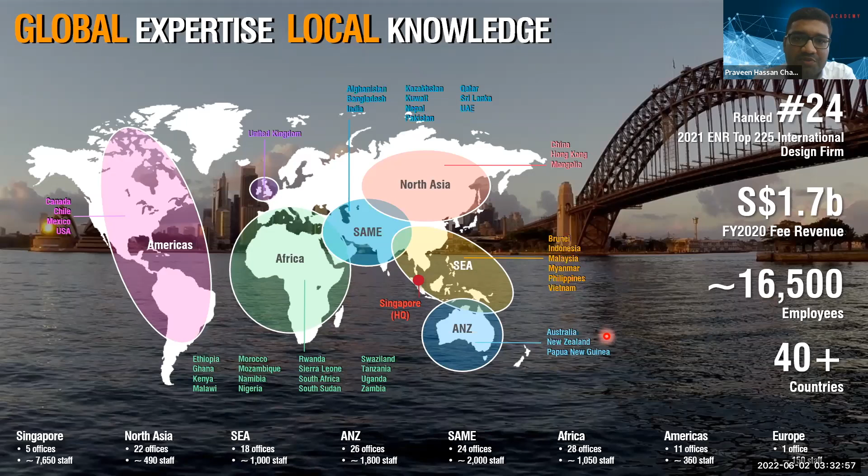So Surbana Jurong is one of the Temasek portfolio companies, and we are under the consumer and real estate wing of Temasek. In terms of our global experience, we are ranked 24th of the top 225 international design firms with a revenue of 1.7 billion. We have a global workforce of 16,500 plus, I think close to 17,000 now, and we are present in more than 40 countries with 120 offices overall. In terms of our partners, we have worked very closely with private partners, government sectors, and multilateral international organizations.

So this is a quick snapshot of the group, what we do, who we are, and next, I will quickly go through some of the projects. I've covered 3 projects in total. The first project is from Surbana Jurong Consultants from the Singapore side, and I'll be presenting 2 or 3 projects from B plus H. Unfortunately, due to time zone issues, Lisa, our sustainability leader from B plus H, is not able to join, so I'll be covering a couple of projects from B plus H as well. The first project will be the NUS School of Design and Environment.

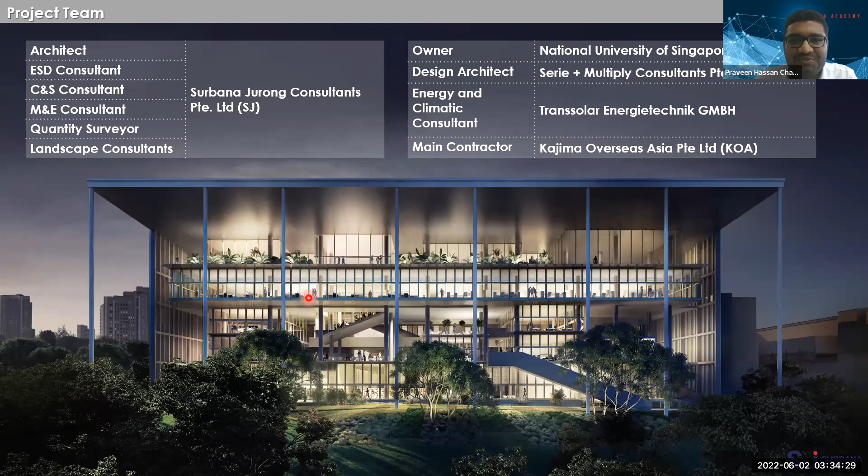Okay, so this is the project team. The architects and ESD, we call it a multidisciplinary team, is from Surbana Jurong Consultants Private Limited, which includes architects, ESD, C&S, M&E, QS, and landscape consultants. The client is National University of Singapore, the design architect is Serie and Multiply, and we have a few other partners like Transsolar and Kajima. So these are the project photos. We are very proud of this project. Even Joy was part of this project before she joined World Green Building Council.

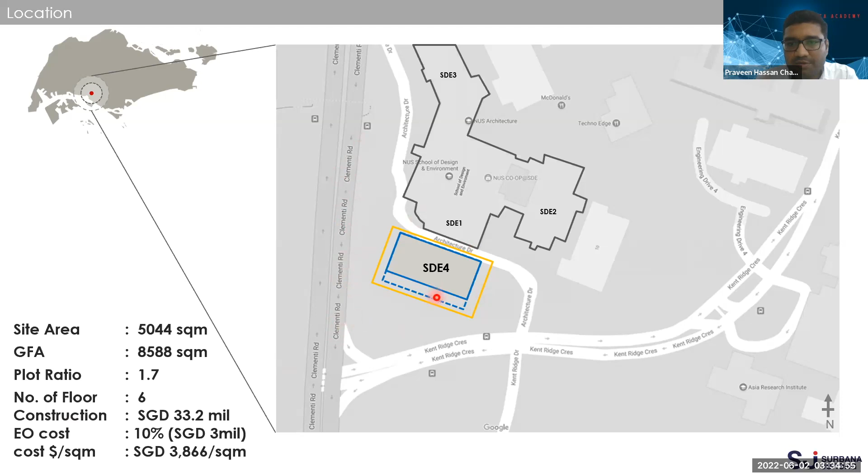In terms of location, this project is located within the NUS campus. The total site area is around 5,000 square meters, GFA around 8,600 square meters. We have 6 floors, with a total construction cost of around 33 million. It's along Clementi Road within NUS. This building is Singapore's first new build net zero energy building. The building is also a hub for test bedding of green building technology. The sustainable design of NUS SDE4 defines a new standard for energy efficient buildings in Singapore.

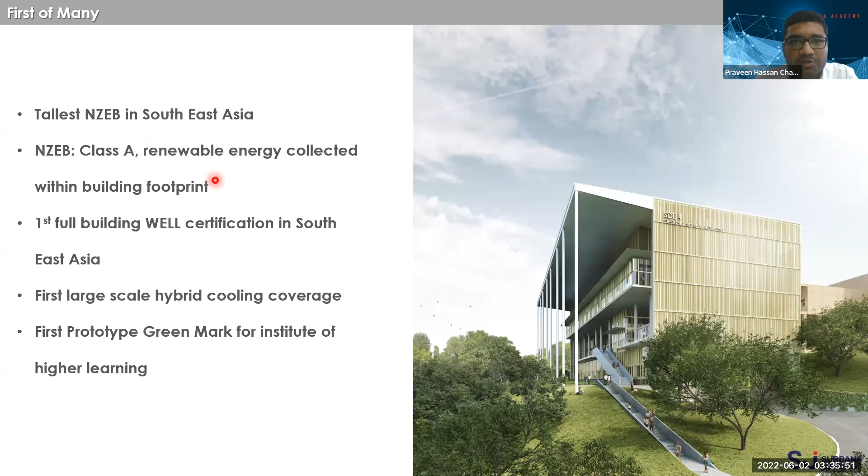It was also a pilot project for Institutes of Higher Learning in Singapore, and the first building which has achieved WELL certification in Southeast Asia for institutions of higher learning, and the first large-scale hybrid cooling coverage. We also have on-site renewable energy. We don't have any off-site and no carbon credits. Everything is offset using on-site renewable energy. So these are the many firsts for this project. And recently it was awarded Leadership in Sustainability under the carbon performance category by Singapore Green Building Council at the recent awards night.

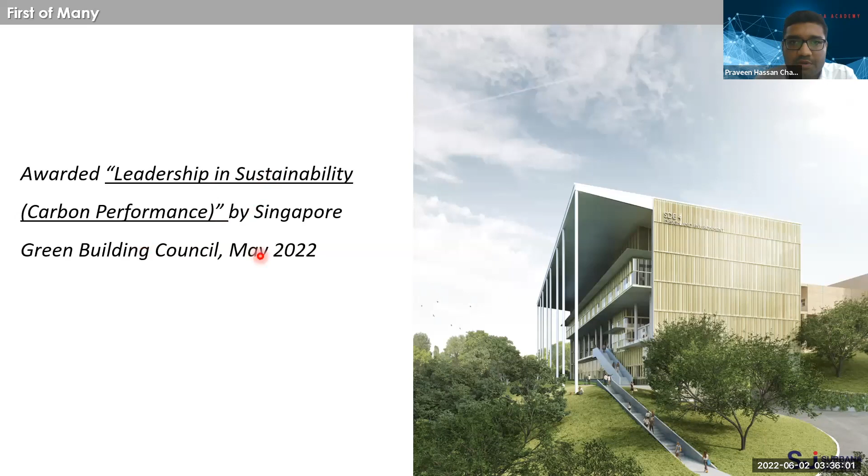So I'll come to the key strategies. So in tropics, I would say it's a challenge, as I think if you know tropics very well, the temperatures are very high. It's very humid, and to convert some of the building or to construct a new building and to make it a net zero energy building is extremely challenging.

It's because unlike other cold countries, we don't have any other renewable energy resource except the solar PV, which is quite promising and also quite proven. But we don't have geothermal, we don't have any other renewable energy, so it's very challenging. So we need to make sure that we have a good design, it's very tight, and we achieve maximum energy saving in terms of optimizing the design, and then whatever leftover we offset with the renewable energy.

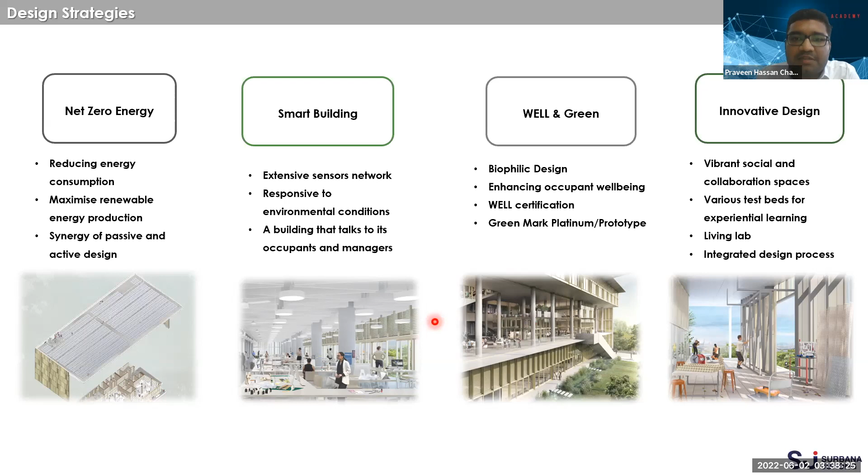And in terms of innovative design, it has very vibrant social and collaboration spaces. It has various test beds for experiential learning. It's also a living lab where building technologies can be tested. So it's a building not just for its occupants, it's a live building where things can actually be tested and demonstrated for the future of Singapore.

So in terms of optimization, since I have limited time, I'll quickly go through some of the key strategies. In terms of passive design, we optimized the massing in such a way that the building is oriented properly, since in the tropics the east and west is quite bad. So we oriented the building pure north and south, so that we have a minimum of 6 months of shading for the north and south. The sun path is very symmetrical in Singapore, so it makes sense that we orient towards the north and south, and we have enhanced the natural ventilation.

And this over-sailing roof not only helps to increase the area for our PV panels, but importantly it will cut the direct sunlight coming in, help to diffuse the daylight, and also help to provide the necessary shading for the facade.

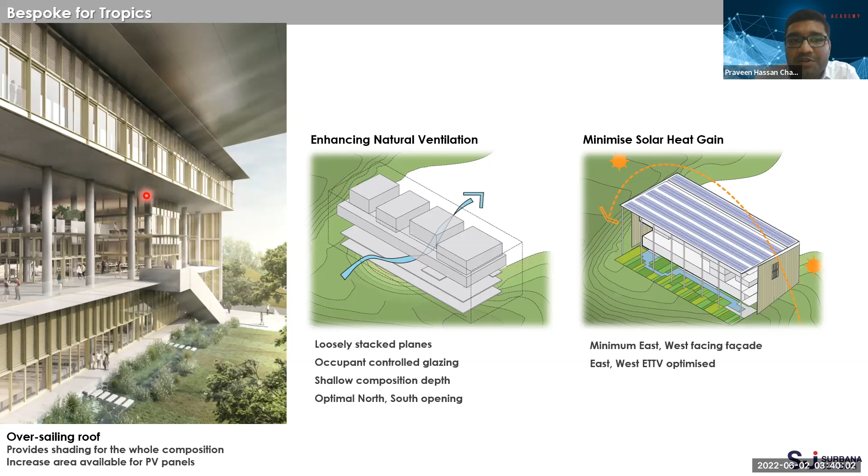So in terms of functional spaces, as I mentioned, this particular building has various spaces for research. We have design studios, prototype workshops, and also spaces for industry collaboration. Just as an example, on levels 5 and 6, we have facade test bedding areas. On the third story, we have a model smart green home, which is testing of sustainable home solutions. And on the second story, we have a green building technology lab.

So it's basically a living lab which demonstrates how a net zero energy building can be designed and sustained in the tropics, and it also provides a path for future integration of new technologies and collaboration.

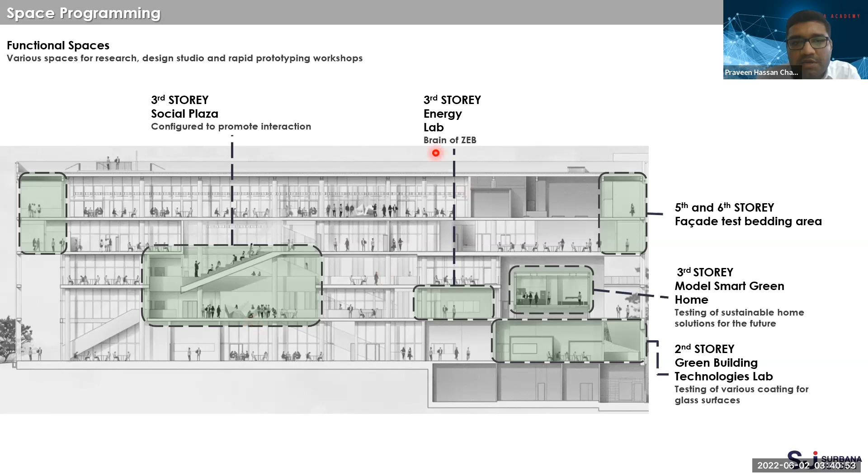So in terms of the energy, as I mentioned, we did a lot of optimization. This is the energy consumption in terms of the reference building. The reference building is a typical institution building, and in terms of optimization, the first step was always passive design optimization. So with some of the strategies I just mentioned, natural ventilation, shading, optimizing the daylight and everything, we were able to reduce the energy consumption to a great extent.

We reduce the load in the first place, and then with the help of active design, and later I'll touch base on what kind of active systems we utilized. In terms of active systems, using hybrid cooling and an efficient electrical system, we were able to reduce energy. Then finally, we did further optimization in terms of equipment selection and plug load management, and all these contributed to reducing the energy consumption. Finally, the total consumption was less than 500 megawatt hours per year, which was then compensated by using the PV panels.

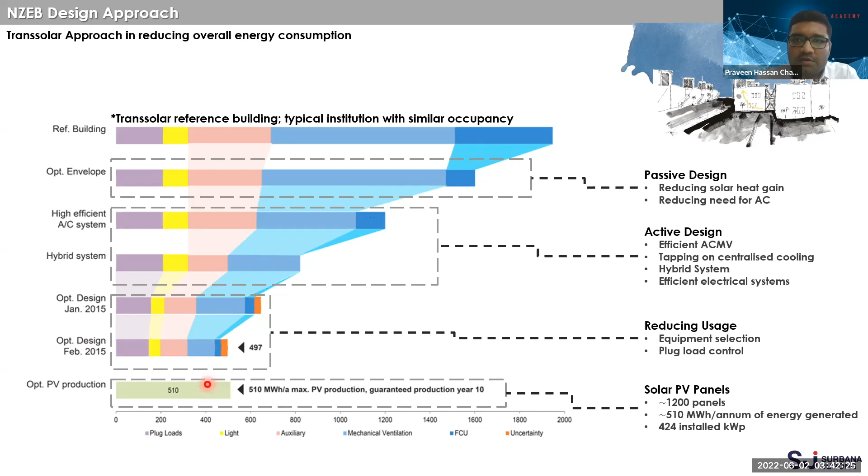As I mentioned, it's a very iterative, integrated design approach, wherein it's a very conscious decision from the entire multidisciplinary team to optimize the building in such a way that the renewable energy only comes in after we optimize the entire building, and it should not be the only solution to offset or make it net zero. So the keywords are integrated design process and performance-based design.

This is a typical studio, just to show an example of how we optimize the space. Firstly, we have an overhang which cuts down the direct solar heat gain and diffuses the daylight. We have lamellas here. These lamellas are tilted around 15 degrees. This can be further tilted, you can close the lamellas. It will also help to further distribute the daylight evenly into the space.

And we have an openable facade. That means if the weather is favorable, we can open up and, with the help of ceiling fans, make it a naturally ventilated space. And by default, we have hybrid cooling. This hybrid cooling includes mechanical ventilation, which is treated but not too cold.

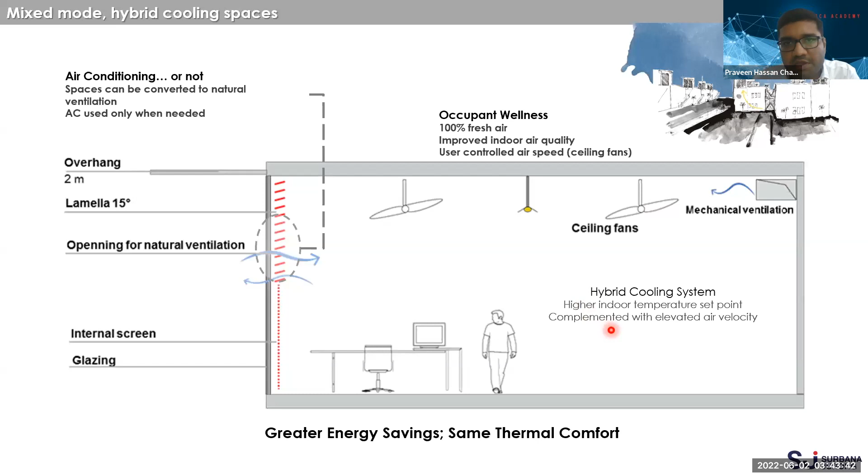Typically in Singapore, we cool the air to around 13 to 14 degrees off-coil temperature to cool the space, but in this case it's very high, around 17 to 18 degrees, and then we maintain the indoor temperature around 27 to 28 degrees, and with the help of ceiling fans we achieve the same thermal comfort that any other typical building can achieve. This is the strategy that was adopted, and most of the common areas are naturally ventilated, which was achieved again by optimizing the passive design.

And these are the instrumentation during testing and measurement and verification. We employed a very comprehensive measurement and verification. This was a mock-up that we did with the sensor setup, stratified sensors, to measure the performance. And we recently cleared stage 1 and 2 verification, and in fact this building is not only net zero, it's a positive energy building. That means it generates more energy than what is being consumed.

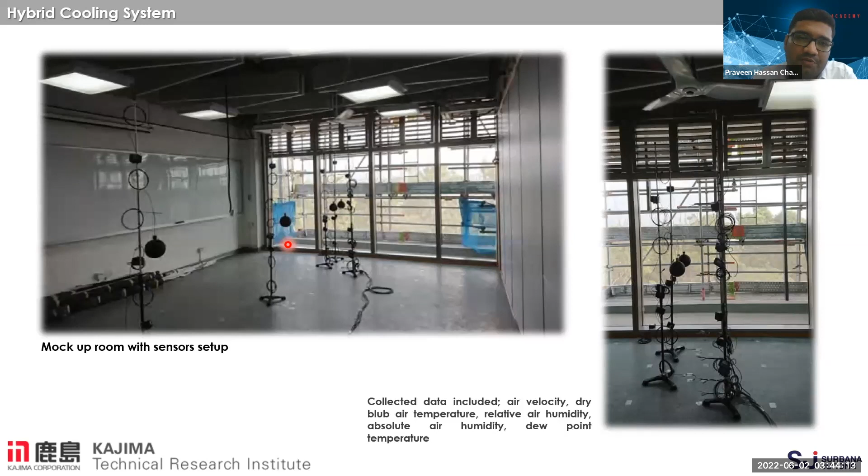And also this building has achieved many awards. You can see our colleagues, you can see Joy here, and myself. This building has achieved Green Mark Platinum and Design Prototype, and it also achieved the Sustainable Cities and Human Settlement Award.

So this building is a testimony and a living example that net zero energy buildings are possible in the tropics, but we need to take the right steps at the early design stage. We need to adopt a performance-based design approach and an integrated design approach in order to make sure that we achieve this without sacrificing either the functional needs or the indoor air quality and wellness of the occupants. So this is a project from Surbana Jurong Consultants.

I'll quickly touch base on a few more projects from B plus H. Initially Elizabeth was supposed to present this. Because of the time zone, she's not able to join today, so I'll be covering this from B plus H.

So similar to our group, sustainability is very key in decision making, and it's also at the heart of the design process at B plus H, and it can be seen in some of the projects that they have delivered. So I'll go through some of the projects which have achieved net zero carbon certification.

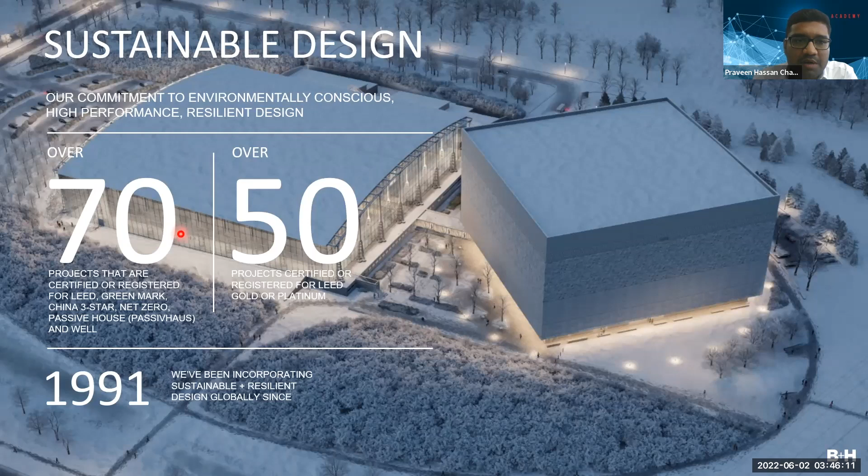In terms of services, they provide architecture, interior design, planning and landscape, and advanced strategies. These are some of the service offerings from B plus H. In terms of design, B plus H is committed to environmentally conscious, high performance and resilient design. As a testimony, they have over 70 projects that are certified or registered for LEED, Green Mark, or other green rating systems, because they are placed all over the world.

They also have a few projects which are China 3-star, net zero, Passive House, and a few other certifications. So these are some of the projects. B plus H was awarded two of the first Canada Green Building Council net zero carbon design and operational certified buildings in Canada. These are the two projects. One is a new building, one is a retrofit. I have one more building, so basically covering 3 project examples.

First is Mohawk College, the Joyce Center for Partnership and Innovation. This building achieved the first net zero carbon design and operational performance certified building in Canada. And Humber College, which is a retrofit, also achieved the first net zero carbon design certification, and Passive House Canada. Later I'll show you some very good design principles that were adopted.

So this is the first project, which is in Gatineau, in Quebec, Canada. It'll be completed in a couple of months; it's targeted to complete in 2022. It has a total GFA of around 12,000 square meters. In terms of functional use, it is mainly used for library and archives.

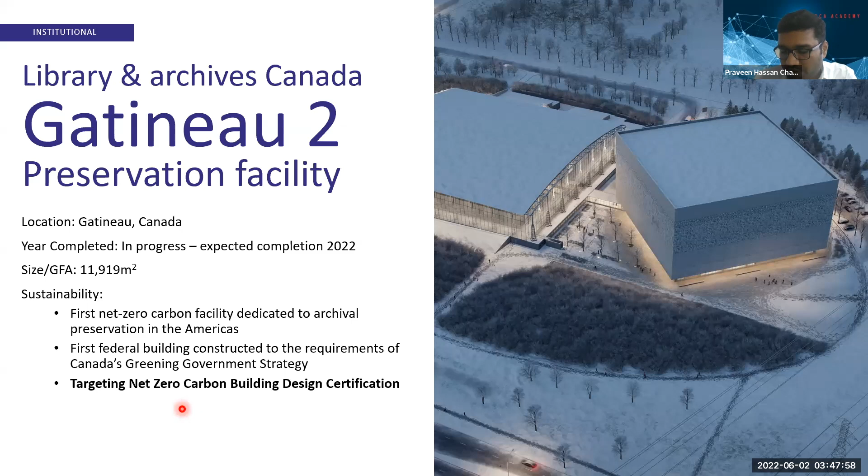In terms of sustainability achievements, this is the first net zero carbon facility dedicated to archival preservation in the Americas, and the first federal building constructed to the requirements of Canada's Greening Government Strategy, and it's also targeting the net zero carbon building design certification. So quite a good achievement. These are some of the perspectives, the images of the building. Sorry. Yeah, these are a few more images of the building.

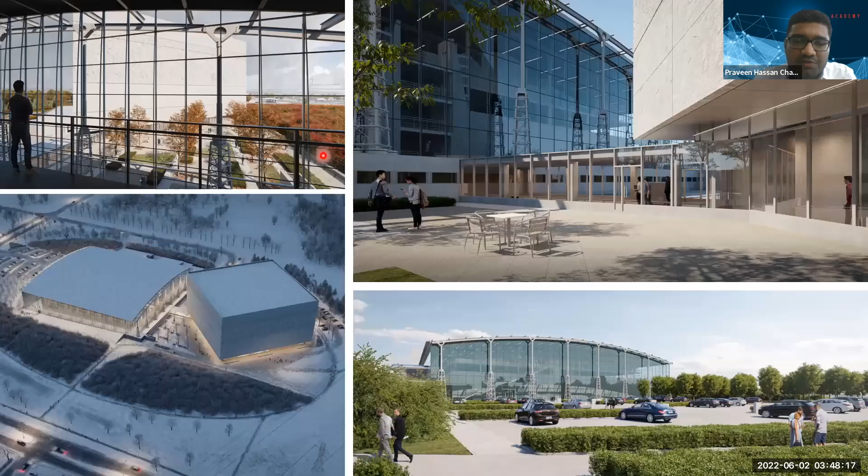So again, the strategy was performance-based design, integrating the sustainable design strategies, and then offsetting with renewables. The second project is Mohawk College, the Joyce Center for Partnerships and Innovation. It is located in Hamilton, Canada. It was completed in 2017 with a total GFA of around 23,700 square meters.

In terms of sustainability certification, it is the first net zero carbon design certified building, and it is also a prototype, like what we did for NUS. NUS SDE4 was a prototype for Institutes of Higher Learning. Similarly, this building was a prototype for an institutional building. Some of the awards include the Royal Architectural Institute of Canada Innovation in Architecture Award in 2019, and it also achieved the Canada Green Building Council Greater Toronto Chapter Innovation and Sustainability Award.

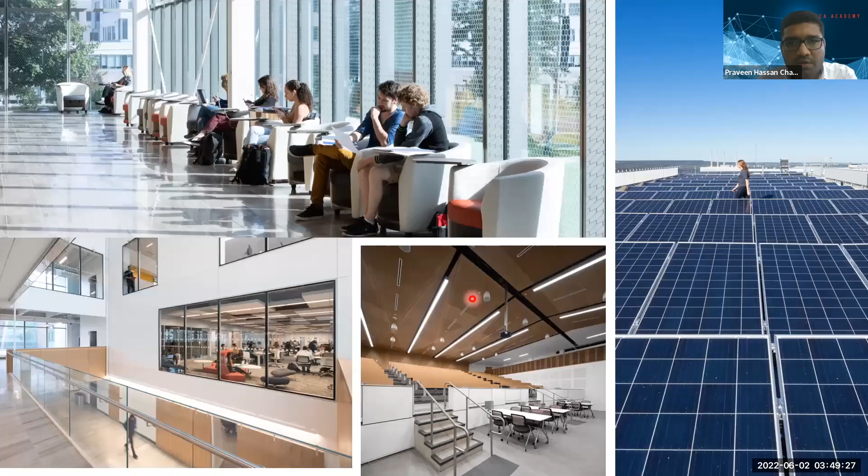And this is how the project looks. As you can see, we have somewhat similar strategies. Of course, we have other strategies when it comes to active design. Again, the key principles of passive design, shading, optimizing the renewable energy. These are some of the images of the project.

We have renewable energy at the top of the two big overhangs, and you can see the indoor spaces are very well lit. We have a lot of daylighting, so we can cut down on artificial lighting. We have enhanced natural ventilation to a greater extent, and even the active designs are designed in such a way that they meet the wellness and well-being of the students and the occupants.

In terms of EUI, this chart shows the difference between a typical Toronto office building versus what we achieved for this project. EUI is measured in kilowatt hours per square meter per annum. A typical Toronto office building is around 450 to 550 kilowatt hours per square meter per annum, the average Canadian office building is around 335, and the average LEED certified building is 162. But some of the projects completed by B plus H are less than 90 kilowatt hours per square meter per annum, and the project we're discussing is around 72 kilowatt hours per square meter.

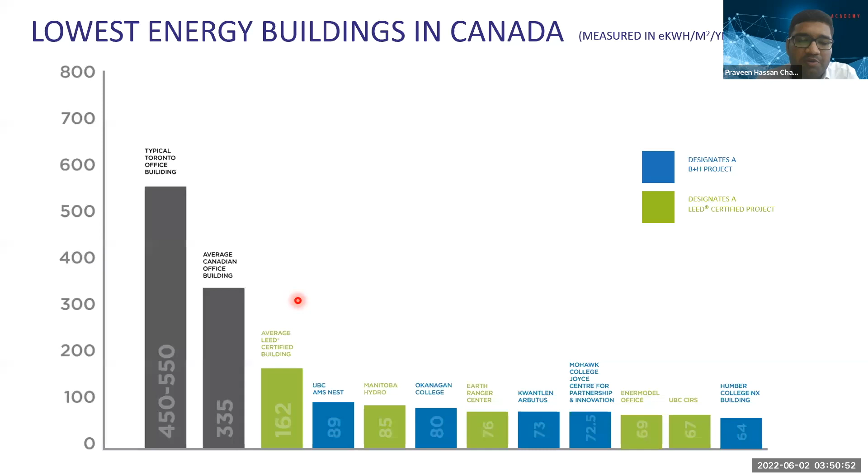As you can see, compared to a typical LEED certified building, we almost halve the energy consumption. So this is actually a testimony to the kind of design optimization that we undertake before we even think of renewable energy. So in summary, some of the key design strategies: optimized daylight and glazing, integration of green spaces in terms of green roof, improved tree planting, and also measurement and verification.

We have adopted a very comprehensive IPMVP in terms of measurement and verification, and optimized active systems. We have utilized ground-based heat pumps. We also have ground-based geothermal energy, which helps us to achieve some of the net zero credentials. Very tight envelope and also high performance facade.

So we have triple glazing with double low-E coating, and we're also doing a lot of work in terms of water sustainability. We used low flow fixtures, stormwater harvesting, and water efficient irrigation systems. This building also encourages use of bicycles, and has bicycle facilities at grade. And in terms of other credentials, it's net zero carbon certified, with 75% better energy performance, as I mentioned.

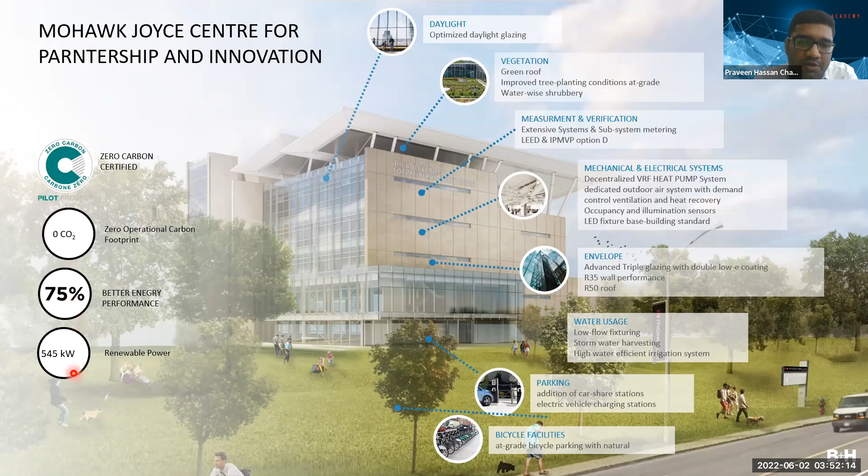And in terms of renewable energy, we have close to 545 kilowatt peak. So that's the capacity of the renewable energy. We also used ground-based geothermal energy, which spans up to 5.2 kilometers of wells and piping in total, and goes as deep as 180 meters.

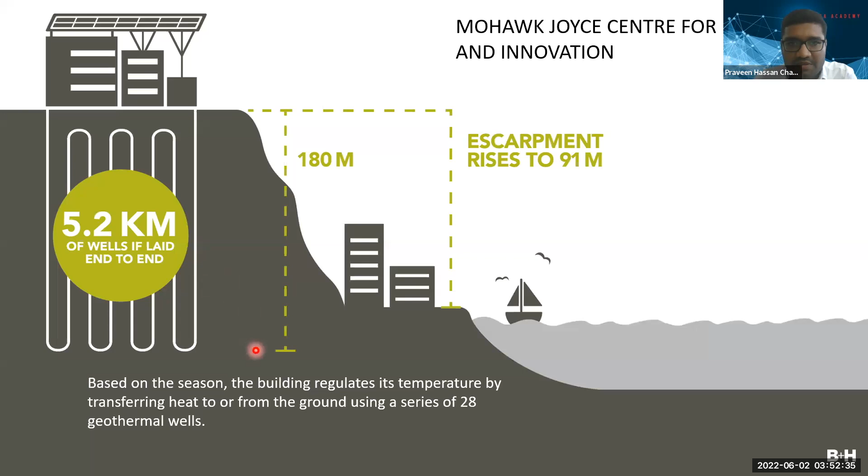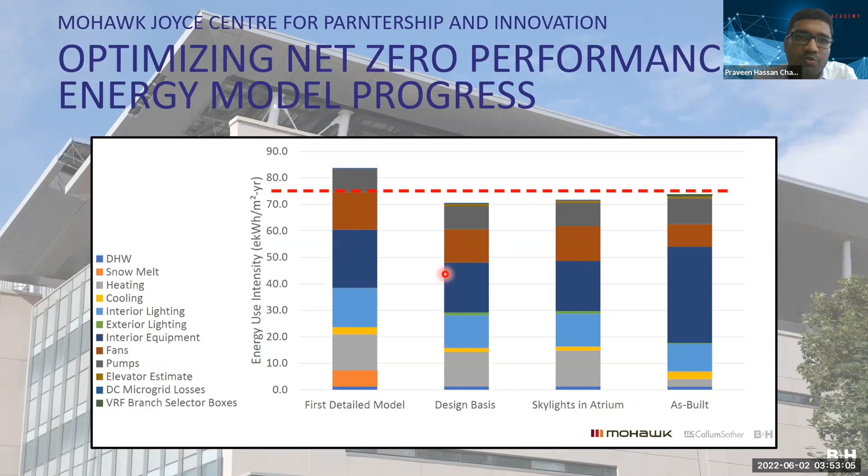So this is what I mentioned in terms of the EUI just now. These are the different iterations that we did, similar to the one which I showed for NUS SDE4. Higher importance was given to passive design optimization, followed by active design and plug load management. We were able to achieve a total EUI of 72 kilowatt hours per square meter per annum, which is quite a massive achievement where you need both cooling and heating at different points of time.

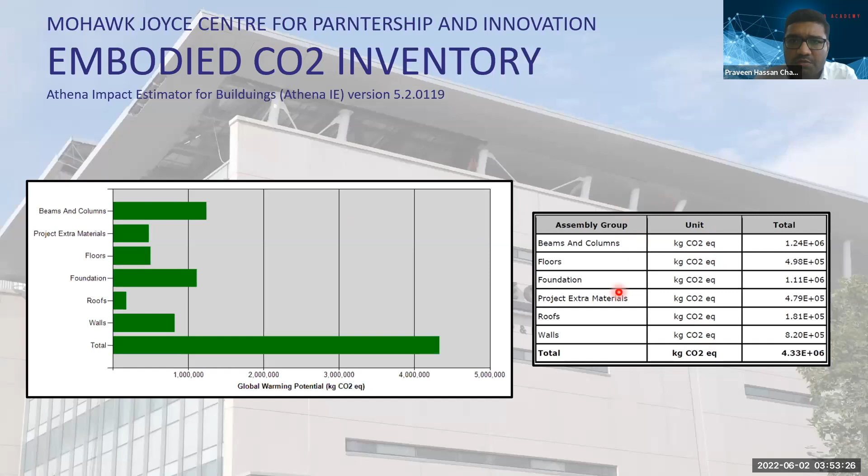And in terms of embodied carbon, we have integrated low carbon construction ideas, which help us to reduce the embodied carbon to a greater extent. And this is the breakdown of the embodied carbon for this project. This project also made the news, and it was visited by some key dignitaries, including Canada's environment minister, who visited the facility and took a look. And these are some of the awards received by this particular project.

So maybe I'll just skip and go to the last project, which is the Humber College building in Toronto, Canada. This was completed in 2019, with a GFA of around 4,800 square meters. It is a retrofit of an original building built in 1989. So this is a perfect example of how we can repurpose a building without demolishing, and reduce a lot of embodied carbon by just redeveloping the existing building.

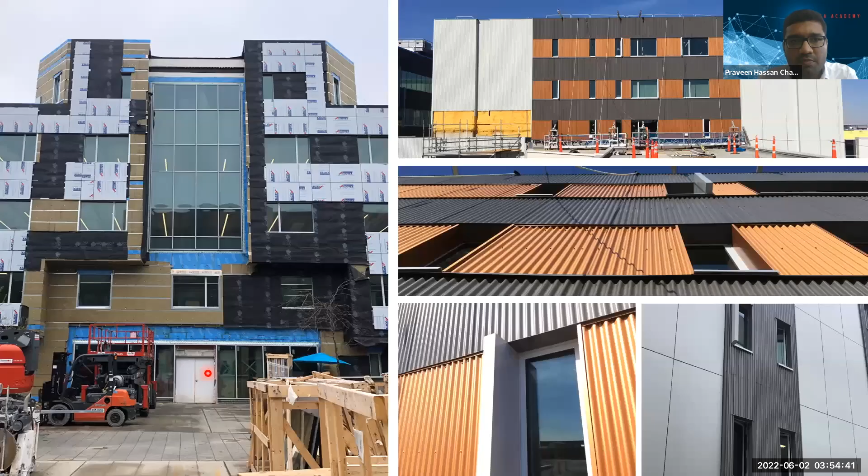In terms of certification, it's net zero carbon design certified, the first net zero carbon certified retrofit building in Canada, and it's also targeting Passive House certification. This is the building while it was under construction. As you can see, we just used the base building structure, and then we optimized the facade in terms of insulation and glazing.

And we are proud to say that the Prime Minister of Canada visited this building, and he also gave a talk on how the built environment can be more sustainable. So we are very proud of this project.

Yeah, that's it. Thanks, Joy. So those are some of the projects. Although we have many other projects from the group, we picked these few for this presentation. As a professional consultant firm, we strongly believe that net zero energy buildings are possible, and that's the reason we demonstrated these projects in different climate zones, be it the tropics or cold climates. If you have the right vision and intent, we should be able to achieve net zero buildings. It's very much possible.